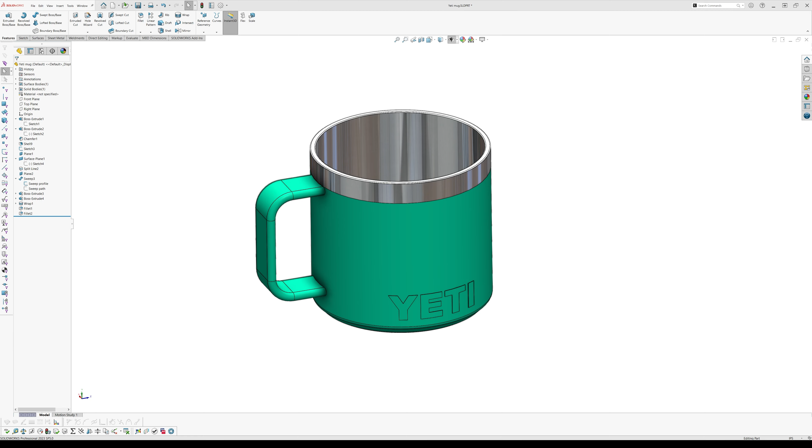By the end of this lesson, you'll learn how to create a 2D sketch, the extrude feature, the sweep feature for creating the handle, the shell feature, the wrap feature to create the logo, and the familiar chamfer and fillet to give your product a nice finishing touch.

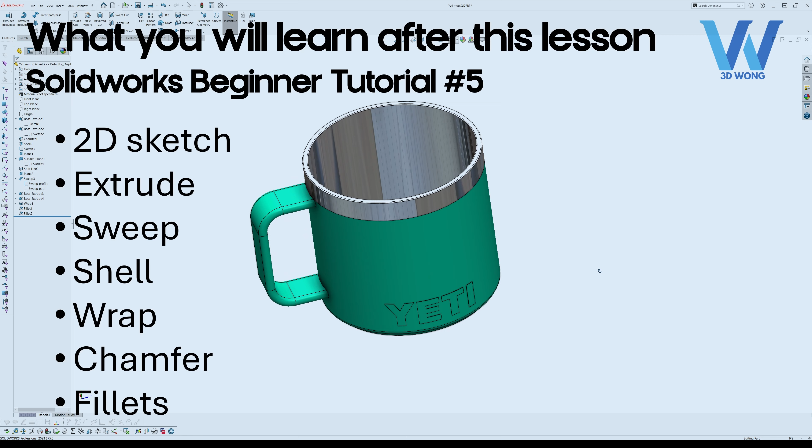Alright, let's jump right in. By now, I hope you're familiar with most of the controls and features in SolidWorks. We'll start by creating the cylindrical body of the mug.

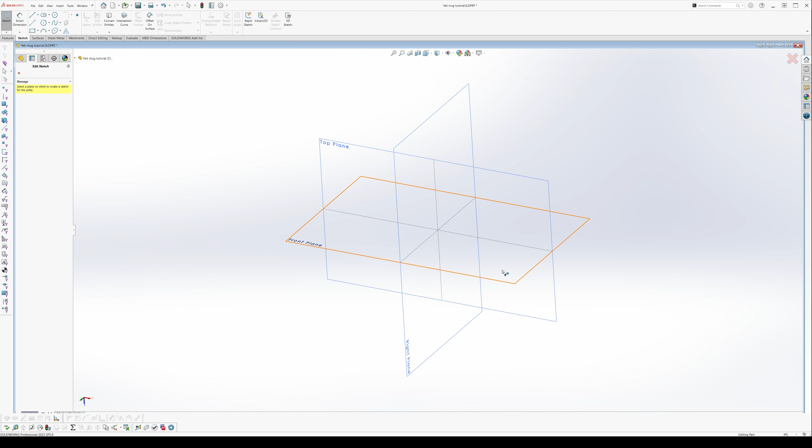To start a sketch, click on the Sketch tab on the Command Manager. With this selected, we can see our 3 primary planes. The Property Manager is prompting us to select a plane on which to begin our sketch. As I move my cursor over the planes, notice that they're highlighted in orange.

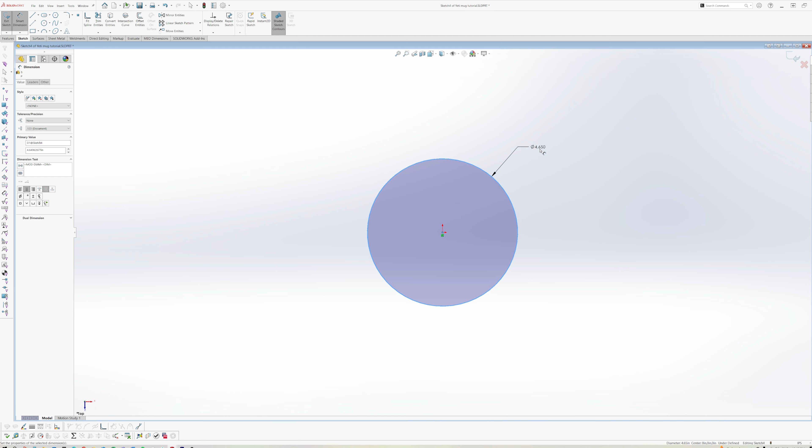This time, we will select the top plane and left-click on it to make a selection. The circle tool is a common feature used in creating cylindrical objects, so we'll use that to create this sketch. Start by clicking on the origin to place the circle, then left-click once more to complete it. Using the Smart Dimension tool on the Command Manager, give this circle a dimension of 4 inches.

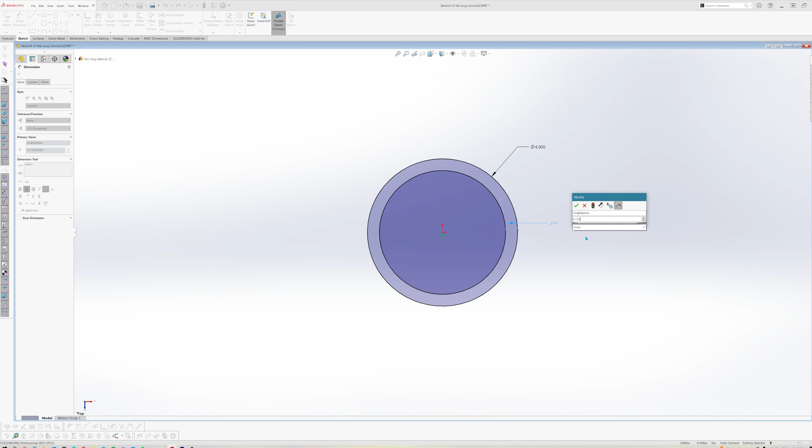Next, we will create a small circle inside of the larger circle. Instead of giving the inner circle a dimension, we will use the Smart Dimension tool to define the wall thickness of the part by first clicking on the inner circle and then on the outer circle. This allows you to define the dimension between the 2 circles. SolidWorks will then prompt you to define this dimension, and we will give it 0.125 inches. Exit the sketch when you're done.

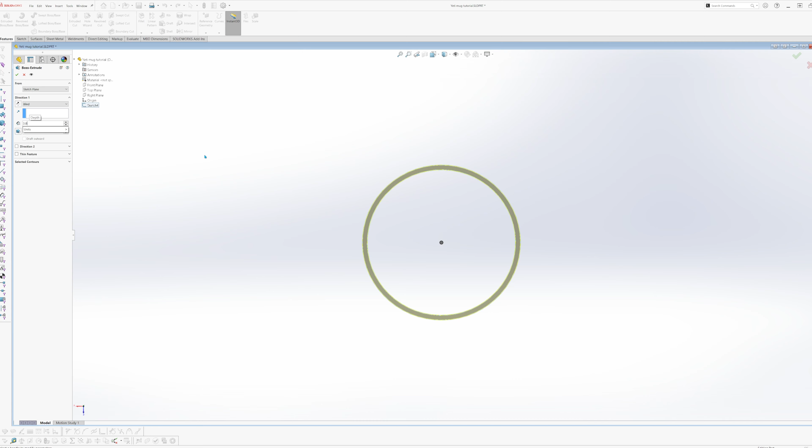With the sketch created, we can now begin to extrude it. Head over to the Command Manager and click on the Features tab, then click on the Extruded Boss tool. SolidWorks will prompt you to select the sketch you wish to extrude — click on the sketch you just created. We will extrude it by 3.8 inches, then hit the green check mark when finished.

Using the same extrude feature, we'll add a base to the cylinder. An easy way to do this is by selecting the base and starting a sketch. Point your mouse cursor to the edge of the cylinder — notice it's highlighted in orange as a visual indicator that an edge is present. Click on it, then go to the Command Manager and click on the Convert Entities icon.

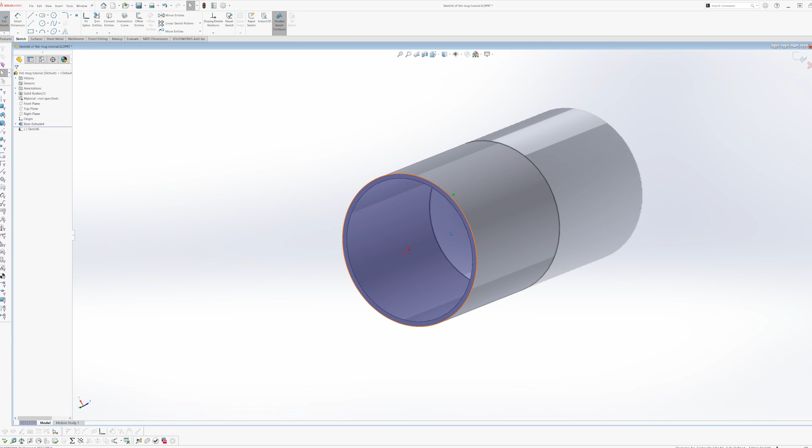What this does is take the edge you selected and convert or project it onto a sketch on the same plane that you started. This is useful in situations where you don't want to recreate a sketch, or you want to quickly borrow 3D features and project them onto a 2D sketch.

Using the sketch you just created, we will extrude it again to complete the base. Go to the Features tab again and select the Extruded Boss tool. This time we'll extrude the base by 0.8 inches. Hit the green check mark when you're finished.

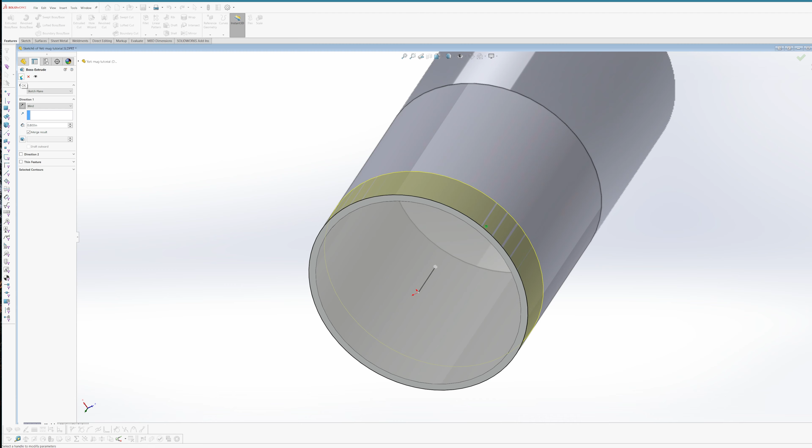We'll perform a cross-sectional view on the front plane to get a better idea of what it looks like. Notice that the bottom looks a little disproportionate from the rest of the mug. This is normal, as we will shell it later to create a hollow bottom that closely resembles a vacuum inside of a thermal mug.

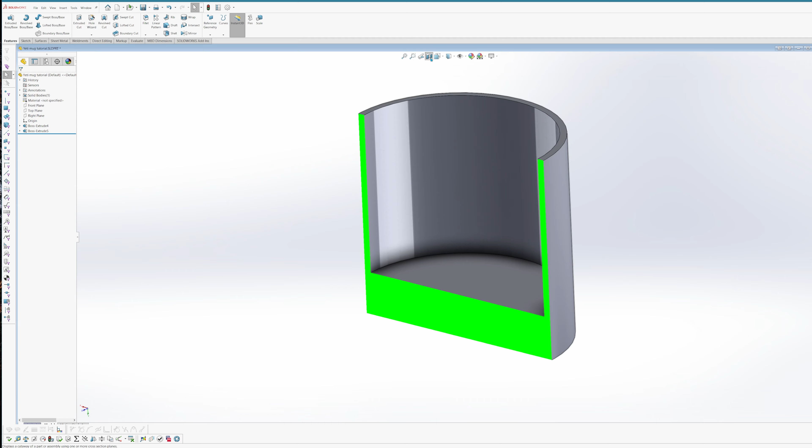On the actual YETI mug, you'll notice there's a 45-degree chamfer at the bottom. We'll add the same feature on our model using the chamfer tool, located on the Features tab. You'll notice at the bottom of the fillet icon there's a small drop-down arrow — click on this arrow and then click on the chamfer tool to launch it.

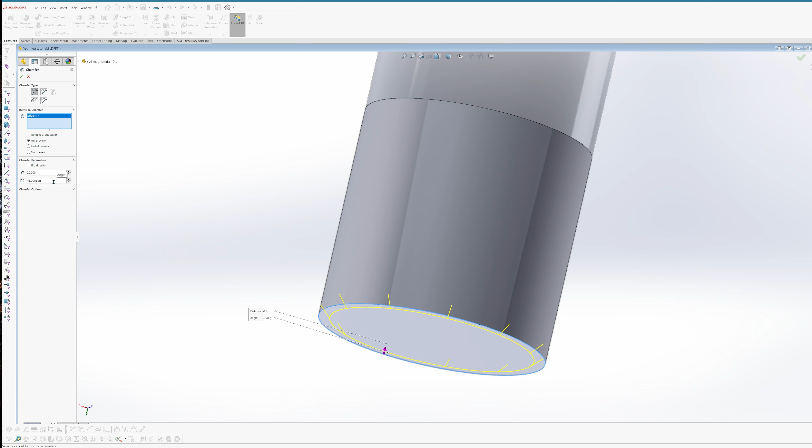Upon clicking on it, the Property Manager will launch to your left. SolidWorks will prompt you to select the edge you'd like to add a chamfer on — click on the edge at the bottom of the mug. Under the chamfer parameters, input 0.2 inches for the dimension; this tells you the distance between the edge you selected and where the chamfer ends. We will also give the chamfer an angle of 45 degrees. When you're finished, hit the green check mark.

Spin the model around to inspect the part.

As you might already know, the YETI mug is a thermally insulated mug that contains a vacuum within the walls. Since heat can be transferred through the air, this mug is designed to keep heat from escaping by means of a vacuum. We will emulate the effect of a vacuum in this mug by using the Shell tool.

You can access the Shell tool by clicking on the Features tab and then clicking on the Shell icon. We will go ahead and select the wall thickness of the part as 0.05 inches. When you're finished, hit the green check mark.

Note that this is just a representation of what a mug might look like on the inside, but there can be other objects such as support structures, weld marks, and so on that are not covered in this tutorial. The next thing we're going to do is create a handle for the mug.

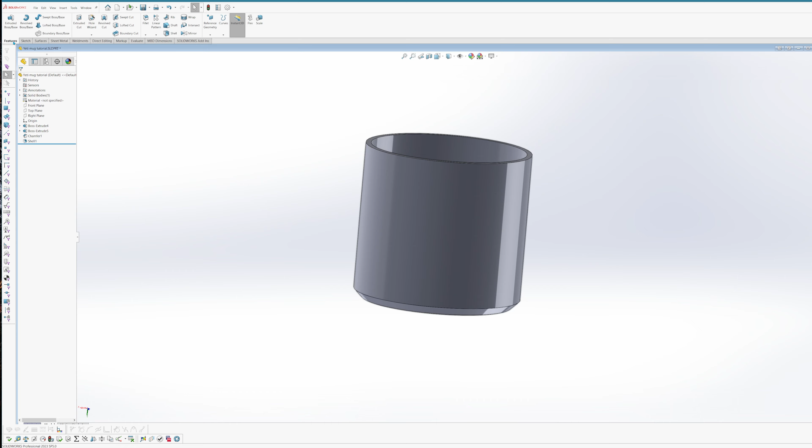The sweep tool is a useful feature to use when it comes to creating 3D objects that follow a path. There are two components to a sweep tool to keep in mind. The first is the sketch profile. The second is the path.

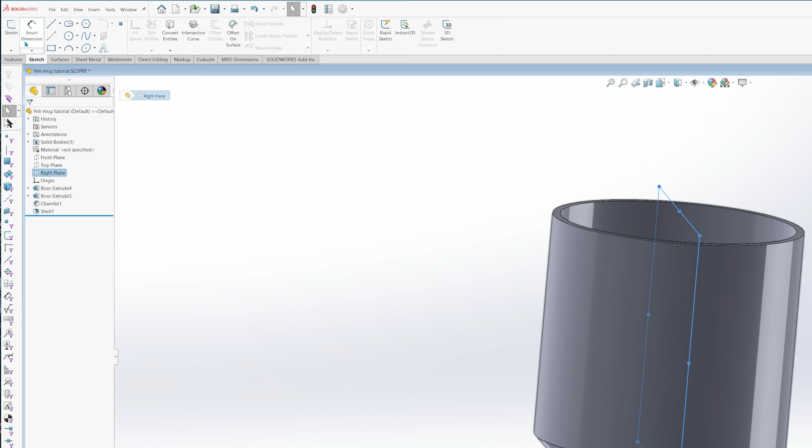Whether you create a path or a profile first shouldn't matter, but in this particular example, I'm going to be creating the path first. We will start by clicking on the right plane in the design tree and starting a 2D sketch. I'm going to be doing a cross-section view here, so it's going to be a little easier to visualize this. Go ahead and flip the part around and position it nice and straight before starting your sketch.

Using the line tool, start by placing 3 lines resembling the handle of a cup.

Next, we'll dimension the sketch as follows: 1.2 inches from the vertical line to the walls of the mug, and 0.41 inches from the top of the handle to the top of the mug.

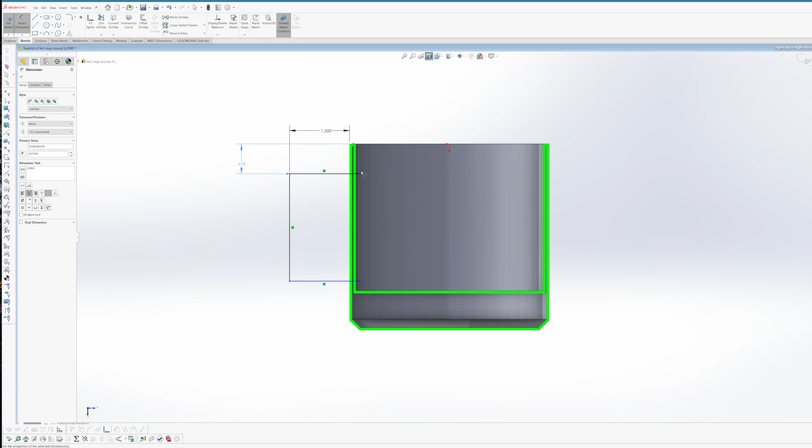Now notice that the horizontal lines are spilling into the insides of the mug. I don't want this to happen, so I'm going to adjust the endpoints by dragging both of the horizontal lines and then shifting that outwards to the left.

Give the distance between the endpoint of the sketch and the edge of the mug a dimension of 0.1 inches. Now do the same for the bottom horizontal line. Give the height of the handle a dimension of 2.5 inches.

We will use the sketch fillet tool to round out the corners. This shortcut is useful to quickly create curves around the corners. We will give it a radius of 0.5 inches.

Once you're finished, the sketch should be fully defined and appear in black. Exit the sketch when you're finished.

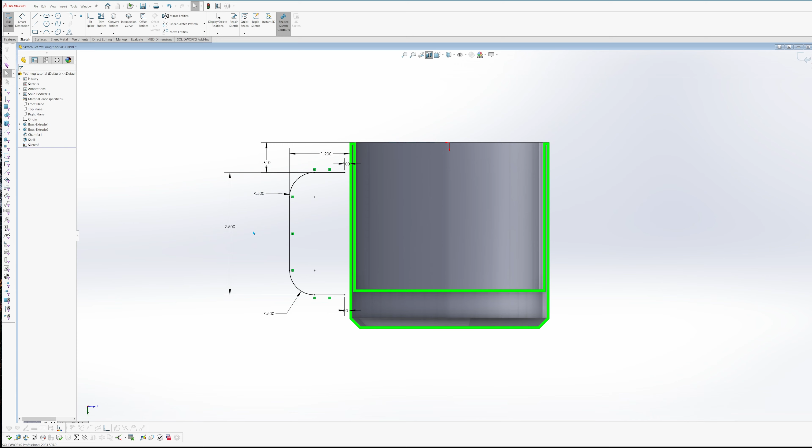A general good practice in SolidWorks is labeling the sketches in the design tree so that you can easily reference them when creating the sweep later. I'll go ahead and rename sketch 8 as sweep path.

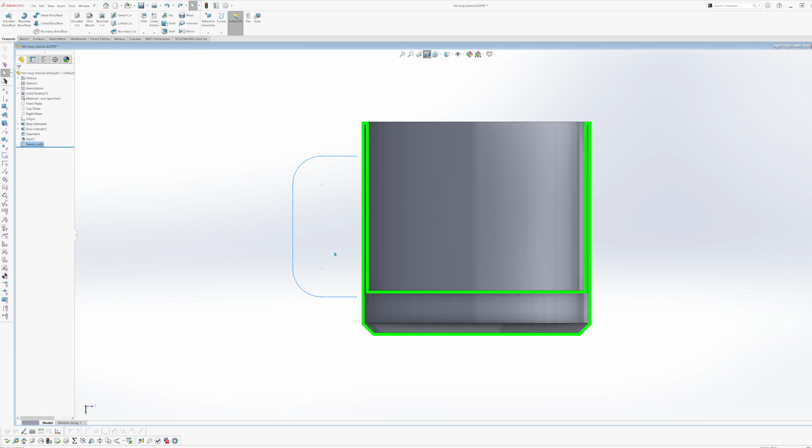Now let's shift gears right now to create a sweep profile. This can be accomplished by creating a plane that is positioned perpendicular to the endpoint of the sketch path. It is critical to note that the sketch profile must be in contact with the sketch path for this to work.

Go to the Command Manager once more and click on the Features tab. Click on the Reference Geometry icon, then click on Plane.

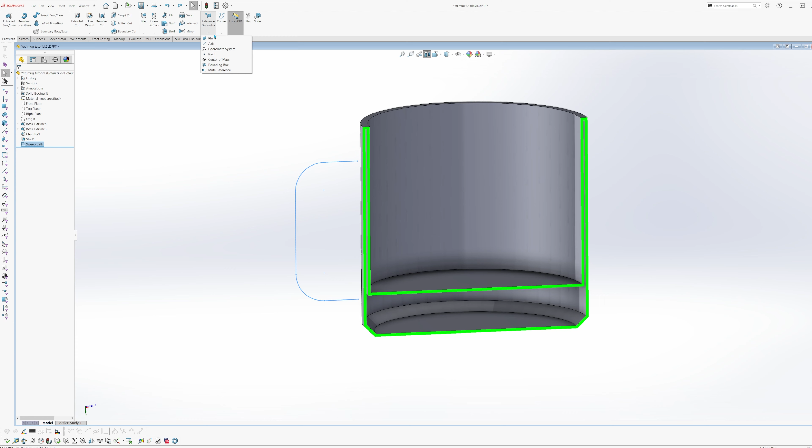SolidWorks will then prompt you to define how you want a plane to be positioned. Click on the first endpoint on the sweep path as the first reference. Click on the second endpoint as the second reference. Finally, select the right plane as the third reference.

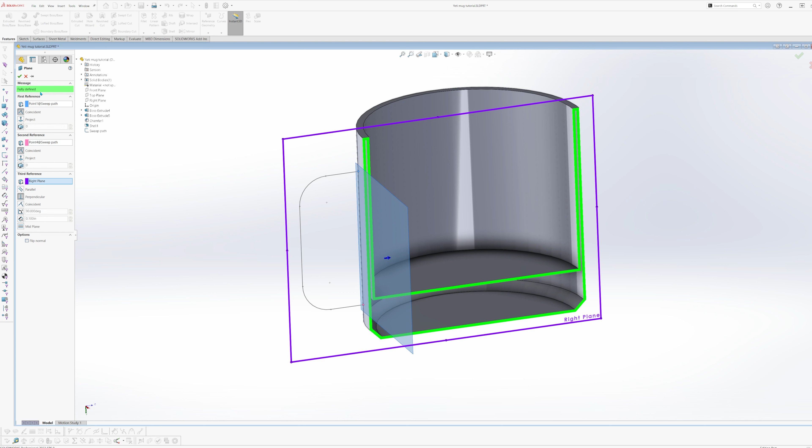When done correctly, you should see a green message that reads Fully Defined in the Property Manager. What this means is that SolidWorks is able to create a plane based on the references that you've provided it. Rotate the sketch around a little bit to confirm that this is the correct positioning of the plane. When you've confirmed that this is what you want, click on the green check mark.

Using the new plane you've just created, we will start creating the sweep profile. Click on the plane in the design tree. Head on over to the Sketch tab again and create a 2D sketch on this plane.

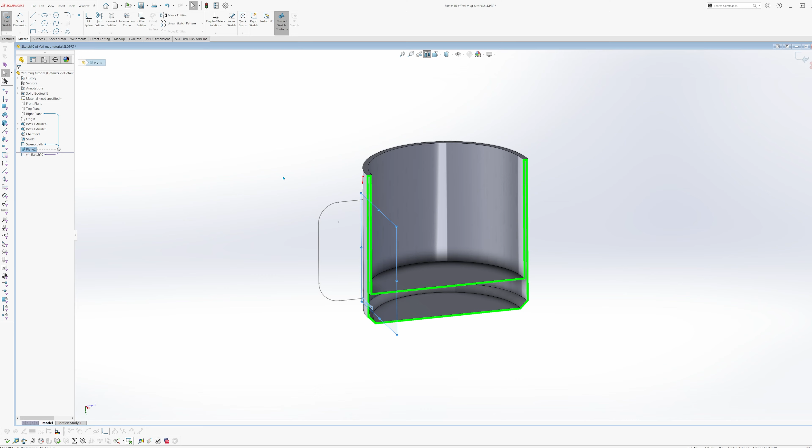Rotate the model so that the plane is normal to the sketch. Click out of the cross-section view.

Make sure that the sweep path is visible. If you are unable to see the sweep path, you may have to right-click on a sketch in the design tree and unhide the sketch by clicking on the icon that resembles an eyeball. We will use the center point straight slot tool to create this sketch.

You would want to click on the end point of the sweep path, as this is where we want to start our sweep profile. Notice that as soon as you start clicking on it, a horizontal line is shown. Click on it again to place the sketch.

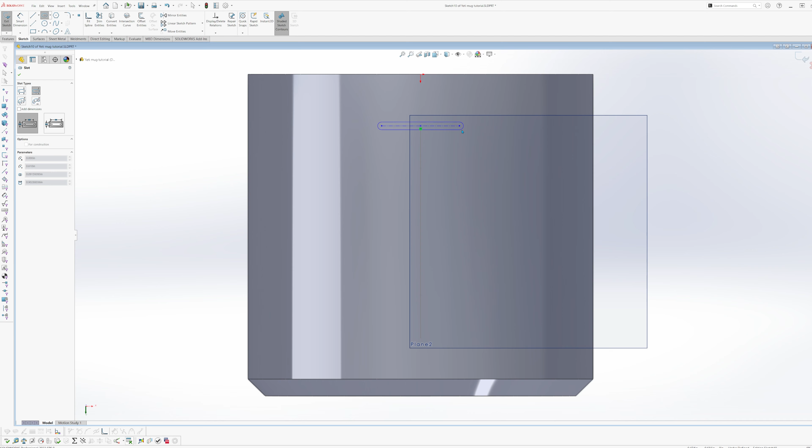Make sure that the center point of the sketch is coincident to the endpoint of the sweep path. Sometimes you might want to move the undefined sketch around so that both endpoints are easily identified and constrained.

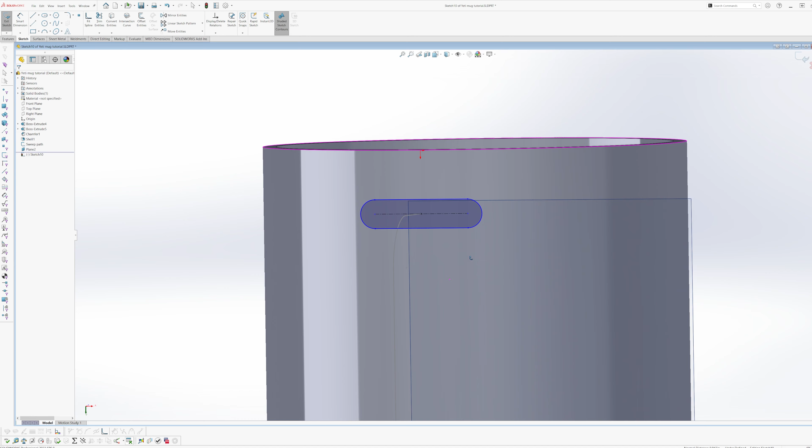Next, we'll start dimensioning the sketch. We'll give the sketch a height of 0.2 inches, and we'll give the sketch a width of 0.68 inches.

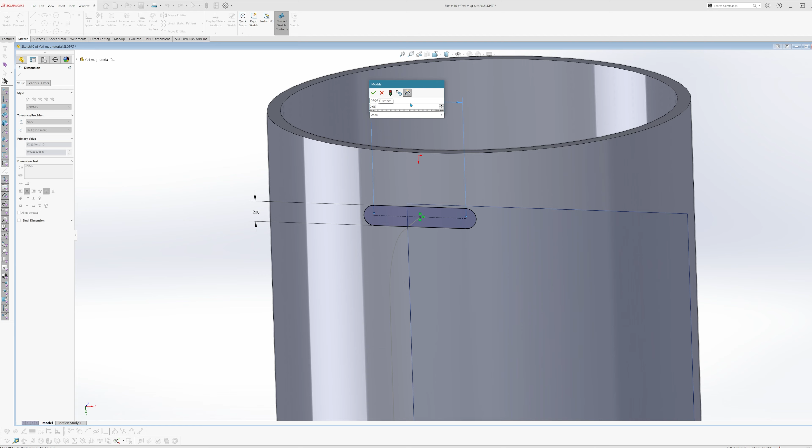When you're finished, exit the sketch. Go ahead and rename Sketch 10 as Sweep Profile.

With both the sweep profile and the sweep path created, you are now ready to use the sweep tool. Head on over to the Features tab and click on the Swept Boss Base tool located in the Command Manager.

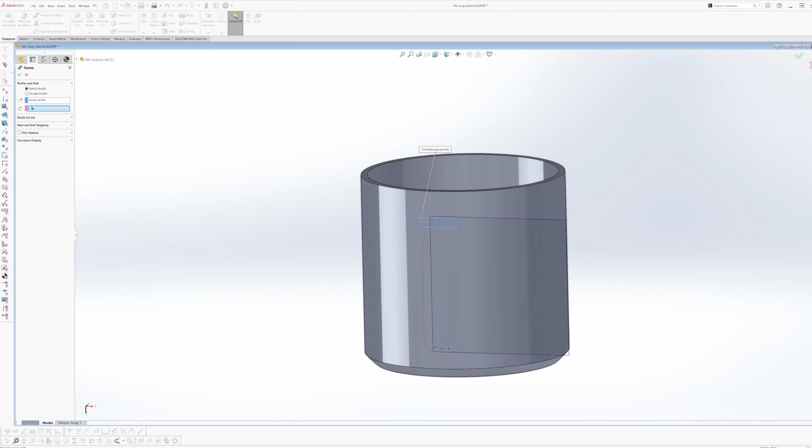SolidWorks will then prompt you to select a sweep profile and a sweep path. The sweep profile is already selected for you since you clicked on it, but the only thing missing right now is the sweep path. Click on it to complete the prompt.

After you have selected your sweep profile and sweep path, SolidWorks will show you a quick preview of what this might look like. When you're satisfied with what you see on the screen, go ahead and hit the green check mark.

You'll notice that although the handle was created, there's still a visible gap between the handle and the body of the mug. We will close this gap by simply using the Extrude Boss feature.

Head on over to the Sketch tab once more and create a sketch on the first face located on the top of the handle. SolidWorks will then prompt you to select the face you want to create your sketch on. Ensure that the face is selected and highlighted in blue.

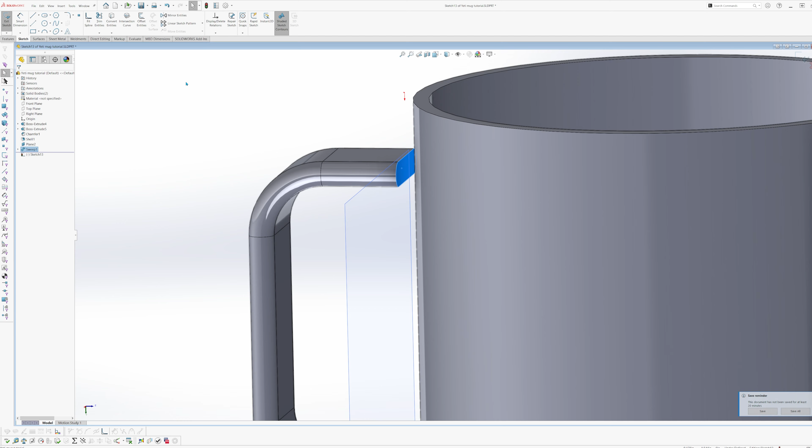Now click on the Convert Entities icon to convert the first face into a sketch. Now do the same for the second face located at the bottom of the handle.

After you have converted the entities into sketches, you are now ready to extrude the sketch. Head to the Features tab and then click on the Extrude Boss tool again.

Now, instead of using the blind option, which extrudes a sketch a predetermined distance, we want SolidWorks to extrude it to the surface of the mug. You can do this by clicking on the drop-down menu and selecting Up to Next.

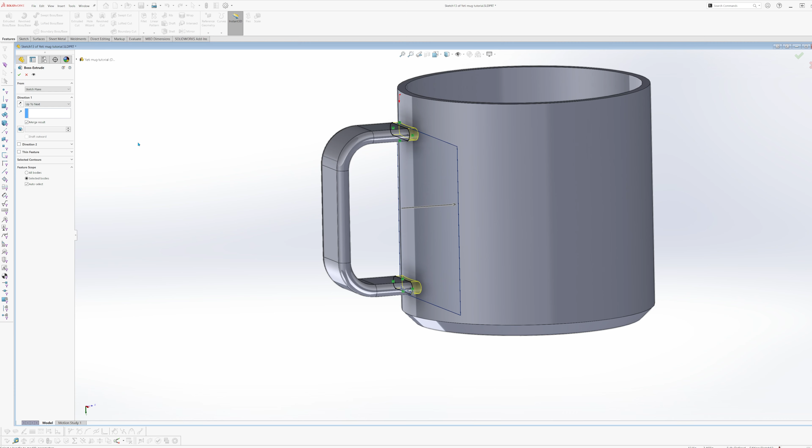This tells SolidWorks to extrude the sketch up to the next available solid that it comes in contact with. This makes your job a lot easier rather than having to manually calculate the distance of the gap. When you're finished, hit the green check mark.

The next thing we want to do is split the mug into two different colors as shown in the beginning, to reflect the stainless steel color on the inside and a green color on the outside. We will utilize the Split Line tool to accomplish this.

This tool splits the face into two separate faces, which can come in handy when you're trying to assign different colors to one or more faces.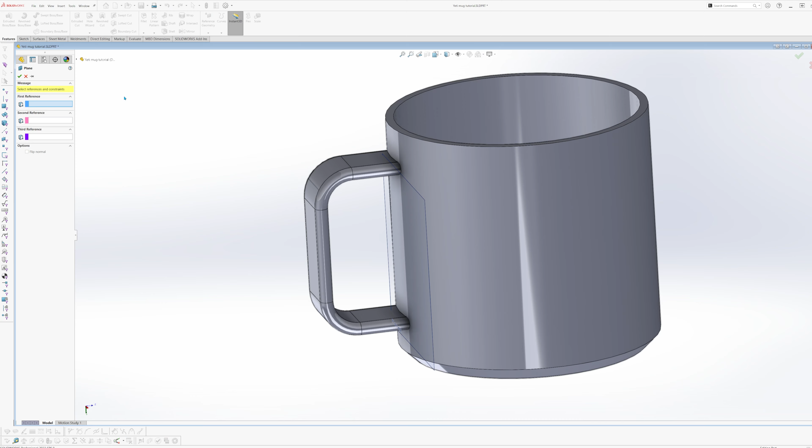With the Features tab selected, let's create a plane that is offset by 0.5 inches away from the top plane. Select the top plane as the first reference and set the offset dimension as 0.5 inches. Hit the green check mark when you're done.

With the new plane selected in the design tree, click on the Curves tool and click on the Split Lines option. There are a few different options you can choose from, but the one we're looking at is the intersection radio button. You're telling SolidWorks that you want to create a split line that intersects a plane or a face.

Click on the plane you just created, and then click on the body of the mug. SolidWorks will then show you a preview of what the split line looks like. Click on the green check mark to confirm.

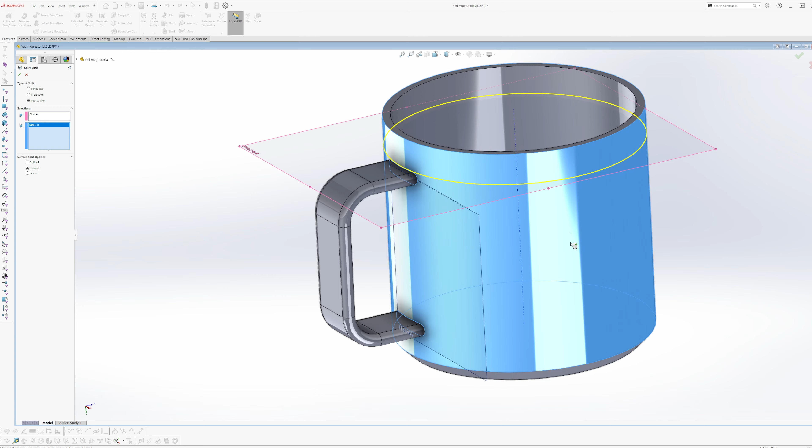With the split line created, go to the Appearance option located on the side of SolidWorks and click on it to reveal several different color options you can choose from.

I want the interior of the mug and the top rim to be in a brushed stainless steel color. Click on the metal folder, then click on the small drop-down arrow next to the folder to reveal a list of different steel-colored options you can choose from. Click on Steel, and then drag the brushed steel color to the rim of the mug.

SolidWorks will show you a menu option of where you would like to apply the color. Click on the Face option to apply the color to a single face. Now do the same for the rest of the faces on the interior side of the mug.

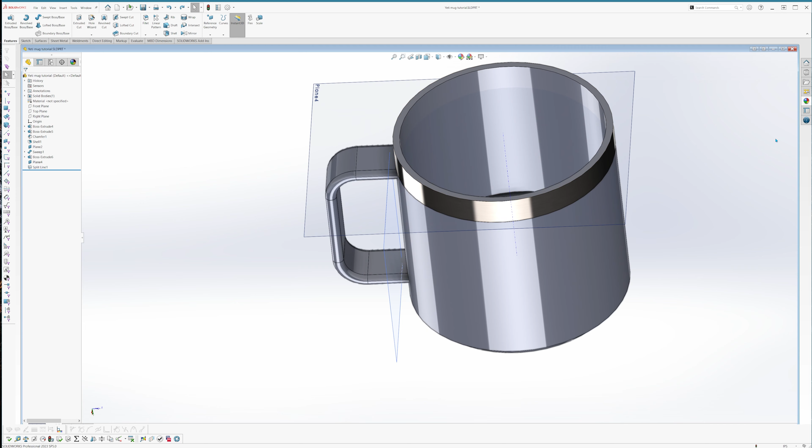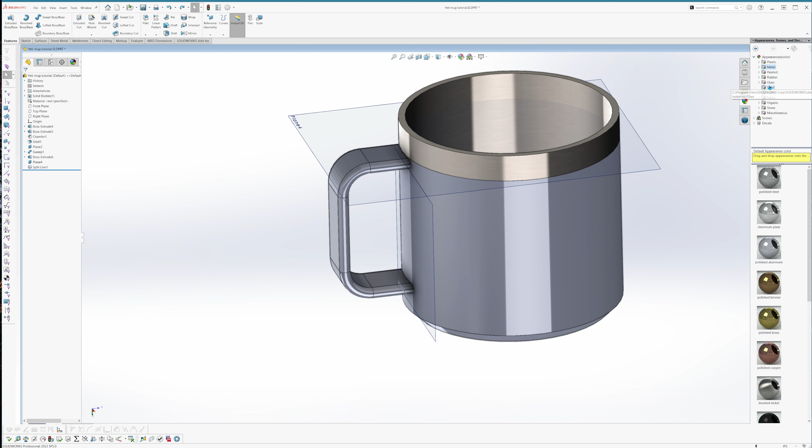There you have it. We will apply a different color to the exterior side of the mug. This time, let's select the solid color option. Green is my favorite color, so I'll drag that onto the mug, and apply that to the rest of the exterior faces in any order you choose.

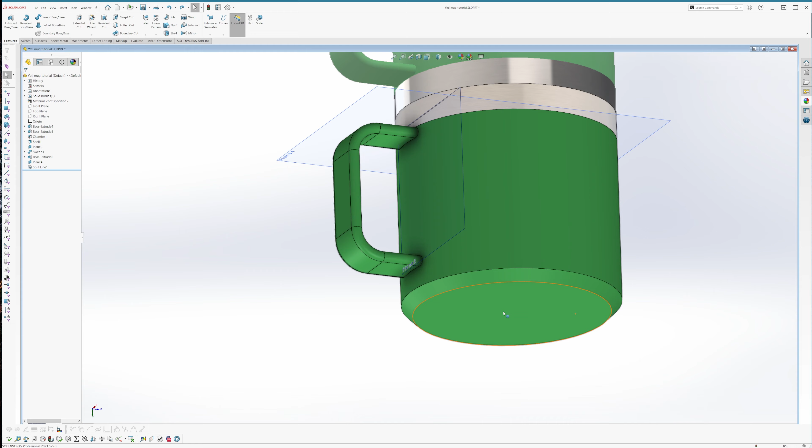One thing I would add is that you can always go back to the Property Manager in the Appearance tab to edit or change the colors at any time. For example, if I want to change this green to a different shade, I would right-click on this color and click on the Edit Appearance option.

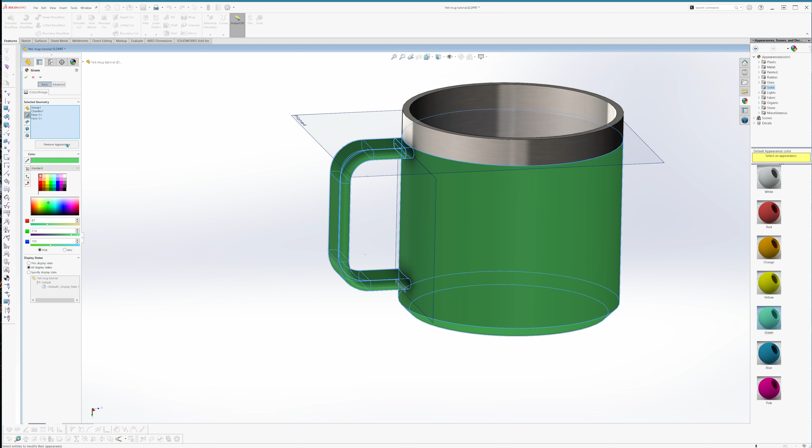You will notice there is a color palette at the bottom with different colors you can choose from. I like teal, which is a variant of green. I'll click on various colors on the palette until I'm satisfied with the color I've chosen. You may play around with the colors until you get the one that you like.

Alternatively, you can also specify an RGB value, which can be convenient if you're trying to import a color into SolidWorks. When you've confirmed your color selection, go ahead and hit the green check mark.

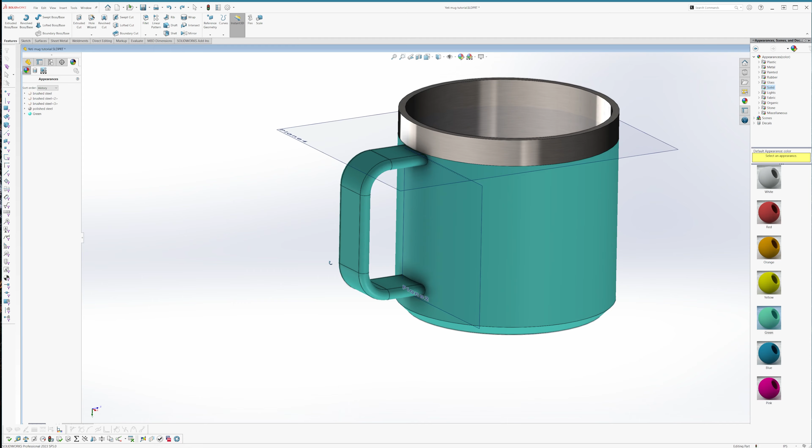Finally, I would like to add the YETI logo to the mug. We will learn how to use the wrap tool for this example. To create text on SolidWorks, you can create a sketch line that runs across the lower part of the mug. Click on the right plane on the design tree, then click on the sketch icon to begin your sketch. Make sure the plane is normal to the direction of the sketch if not already.

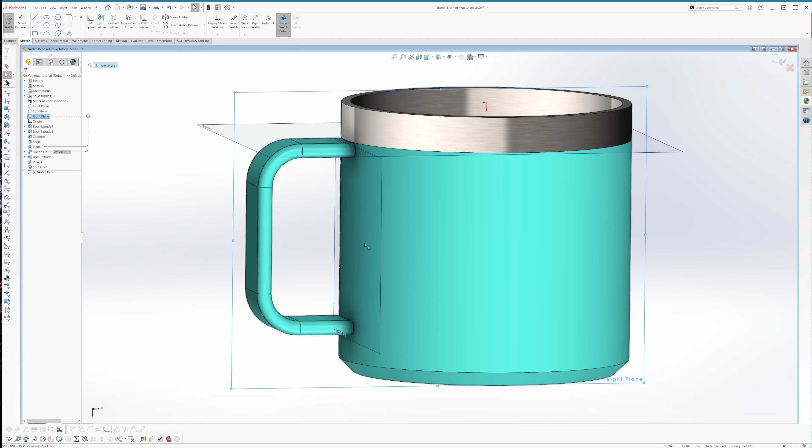Using the Construction Line tool, draw a line starting from the left edge of the mug to the right edge of the mug. We will dimension the sketch line about 0.2 inches away from the bottom edge of the mug.

Once you've created your sketch, you can use the text tool to type words or phrases onto the sketch line. I'll go ahead and type in YETI into the text field. Now notice that the font is a little on the smaller side, so we'll fix that in a second.

But first, check that the font is oriented correctly and displayed in an upright format. If it's not, you can use the flip horizontal or flip vertical options to adjust the text accordingly.

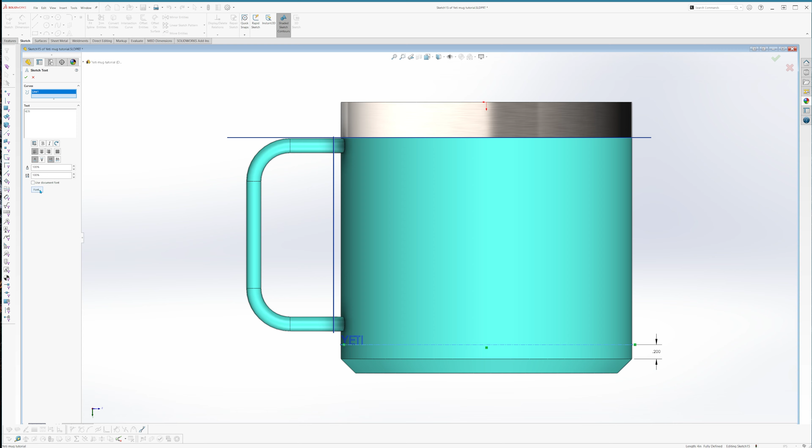To adjust the font type, you need to uncheck the Use Document Font checkbox and then click on the font button that appears. The font that YETI uses is very similar to the Arial black font. Let's choose that font in the list of available fonts.

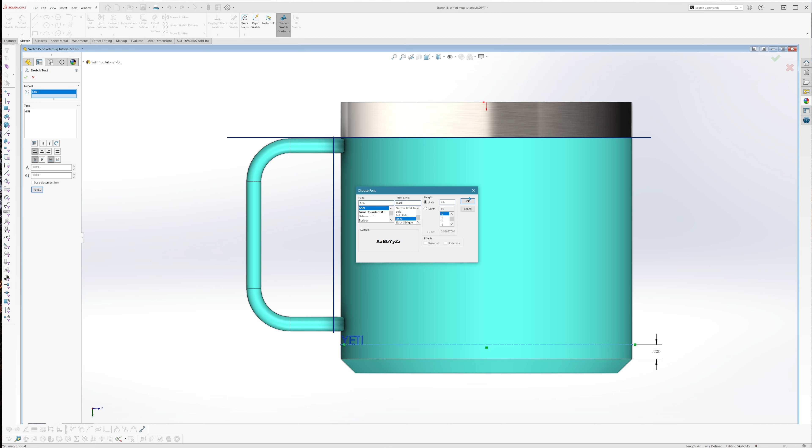Set the units to 0.6 inches to enlarge the text. Click OK to exit out of the screen. Next, we want to also center align the text. Click on the green check mark when you're ready.

Exit the sketch. Now you're ready to use the Wrap tool. The Wrap tool is useful in situations where you want to create an embossed feature out of a text created on SolidWorks. Before launching the Wrap tool, make sure that you click on the sketch that you just created.

Now head on over to the Features tab and click on the Wrap tool in the Command Manager. There are a few different options presented in the Property Manager. For this example, we want to use the Emboss feature and also the Analytical Wrap method.

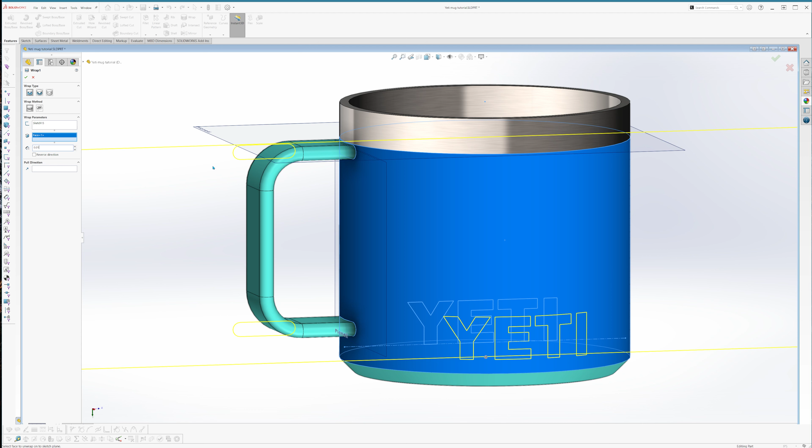Under the Wrap parameters, select the face which you want the logo to be embossed at. Now give it a dimension of 0.01 inches. This represents the amount of material or distance that is being embossed out of the surface. When you're finished, hit the green check mark.

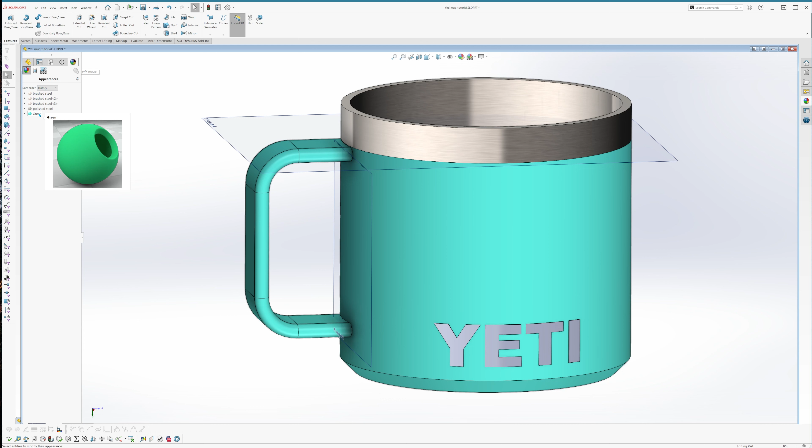Now for the final step. Change the appearance of the YETI logo you just created by going to the Display Manager and clicking on the Appearance tab. Drag the teal color that you just created to the logo. Select the second icon from the left to tell SolidWorks to change the color on the entire emboss feature that you created. There you have it.